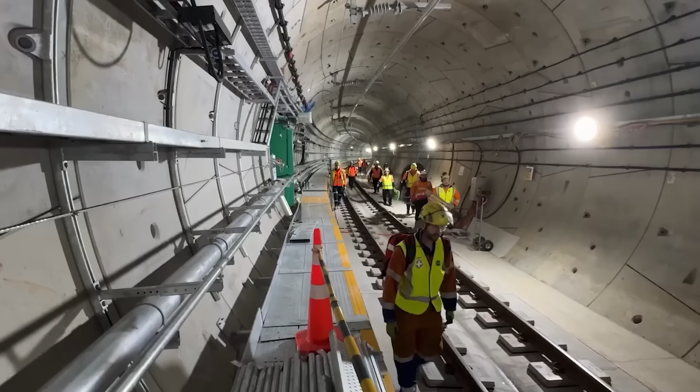City Rail Link is set to open for passengers in the second half of 2026. Auckland's eagerly anticipated City Rail Link is now set to open in the second half of 2026, the government and Auckland Council have confirmed. New Zealand is joining the Underground Rail Club, and it's doing so with a price tag of more than $5 billion.

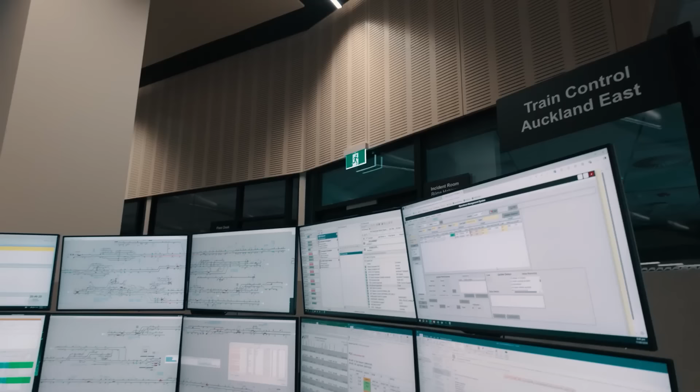For a country with a population of merely 5 million people, this is a lot of money to bank on one project. But the city's rail system has been struggling to keep up with the demand. And with more people choosing public transport over cars, this decision was long overdue. This is the story of City Rail Link and what it took to build it.

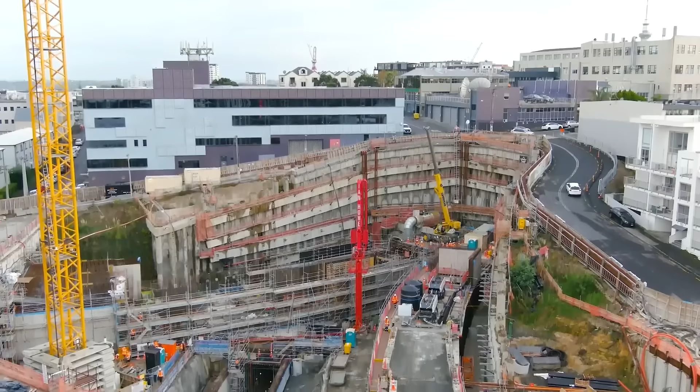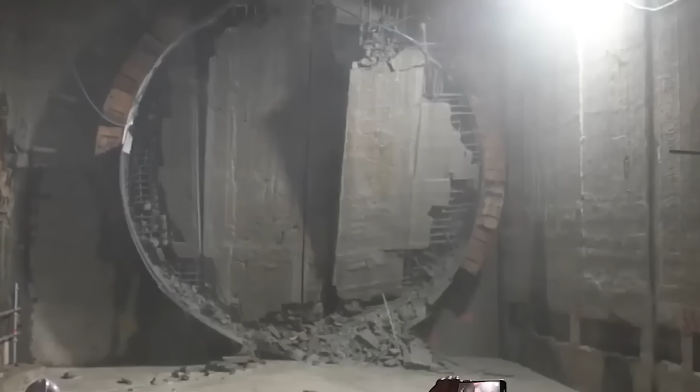The City Rail Link has the potential to transform Auckland from a city where you can't survive without a car to a modern city with fast, frequent, stress-free public transport. To understand why New Zealand spent $5.5 billion digging holes through the middle of its biggest city, you have to understand what Auckland's rail network looked like before this project started.

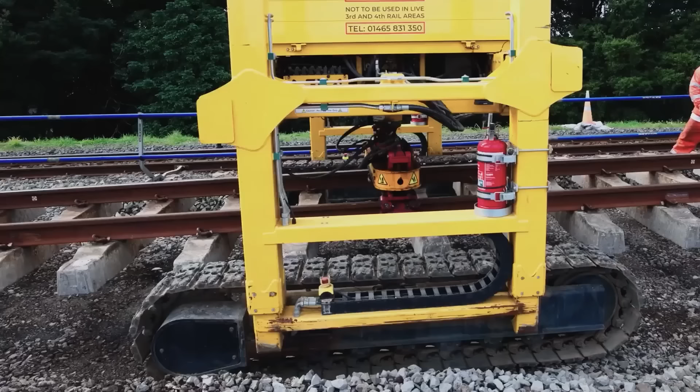The old system had one fatal flaw. Every train had to pass through Britomart, the central city terminus, and Britomart was a dead end. Trains came in, stopped, and had to reverse back out the way they came. That design capped the entire network at roughly 12 trains per hour in each direction. No matter how much you expanded the outer lines, no matter how many new carriages you added, the single point was always going to be a problem.

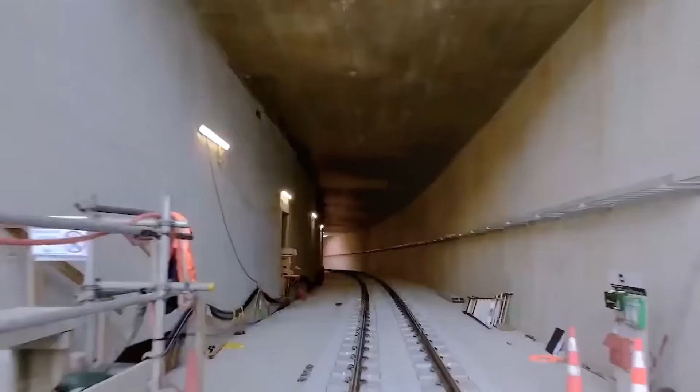The City Rail Link fixes this permanently. By connecting Britomart to the existing Western Line at Mount Eden through a new underground loop, the network transforms from a dead-end terminus into a proper through-running system. Trains no longer have to reverse. They flow continuously. And that single change unlocks 24 trains per hour. That's double the old maximum, and there's room to grow even beyond that. But building a loop through the middle of a live city is not a simple thing.

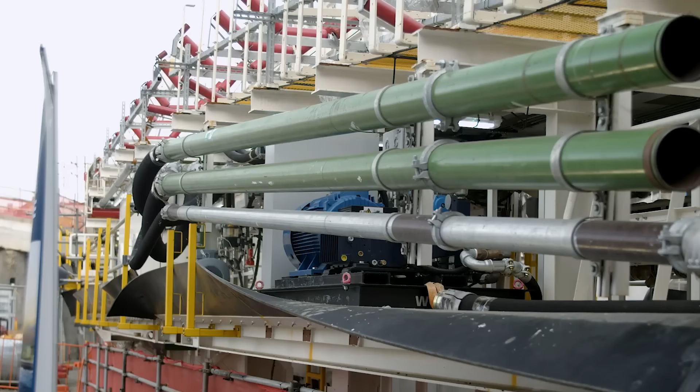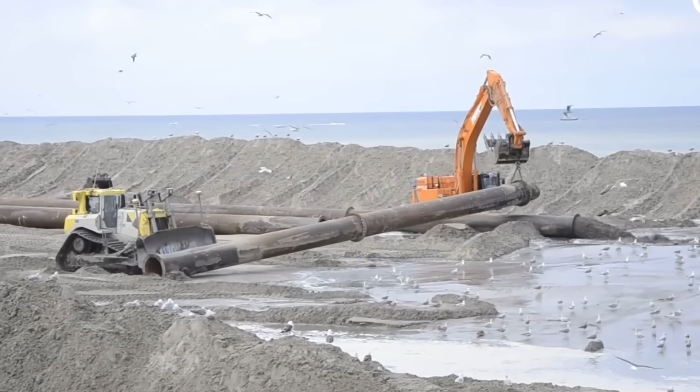Before a single tunnel boring machine went into the ground, engineers spent years studying what was actually down there. And what they found was complicated. Auckland sits on one of the world's most unusual volcanic fields. The city is built on top of roughly 53 volcanic cones, and the rock beneath it is inconsistent, unpredictable, and in some places, particularly near the waterfront, not rock at all. The land is reclaimed, fill material dumped into the sea over a century ago to extend the city's footprint. That fill is soft and waterlogged, completely unlike the basalt you find just a few hundred meters away.

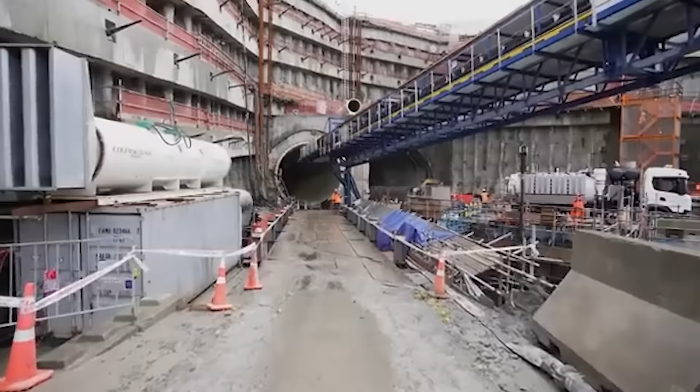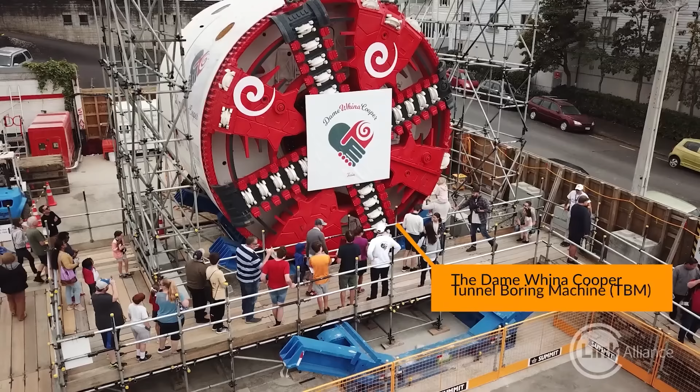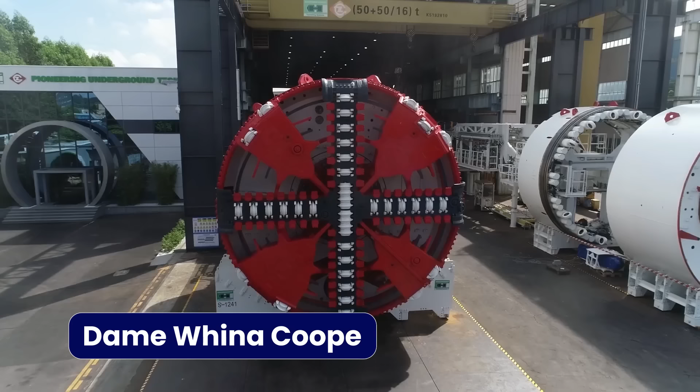So, the tunnels had to navigate two completely different geological environments, hard volcanic rock and waterlogged fill soil, where the ground itself could shift and collapse if pressure wasn't maintained perfectly. This is where the tunnel boring machine comes in. The star of the show. She weighs 2,100 tons and she's 10 meters long. Her cutting head is 6.8 meters in diameter, and her name is Dame Whina Cooper, named after the revered Maori land rights activist. Dame Whina Cooper is what's called an earth pressure balance machine.

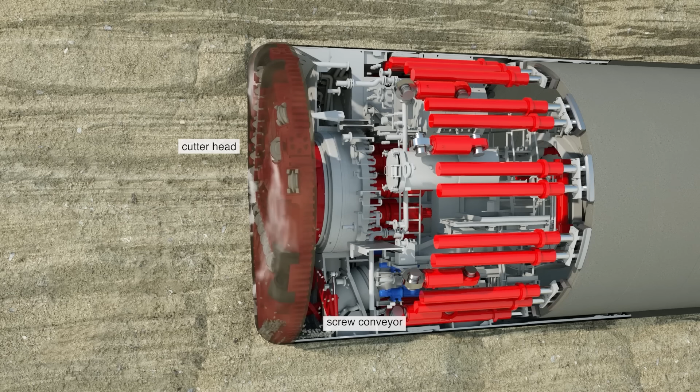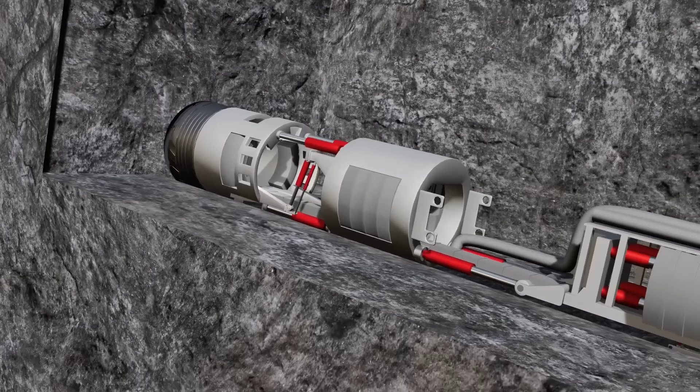The technology is specifically designed for urban tunneling through unstable or waterlogged ground. As the cutting head rotates and bores forward, the excavated material, called spoil, is kept under controlled pressure inside a sealed chamber. That pressure counteracts the natural ground pressure outside the tunnel wall, which prevents the surrounding soil from collapsing inward and stops the surface above from sinking. In a city, surface settlement is critical. If the ground above the tunnel drops even a few centimeters, you can crack building foundations, damage utilities, or destabilize roads.

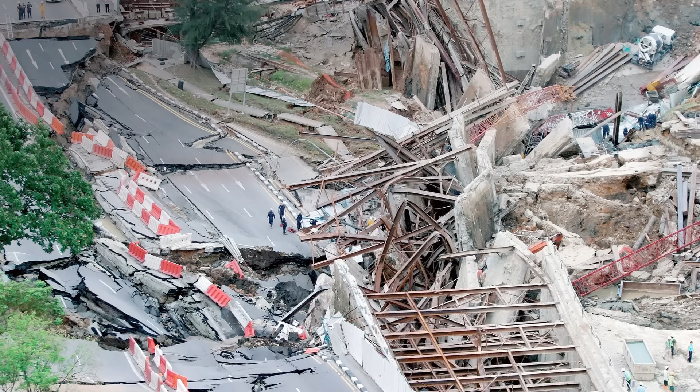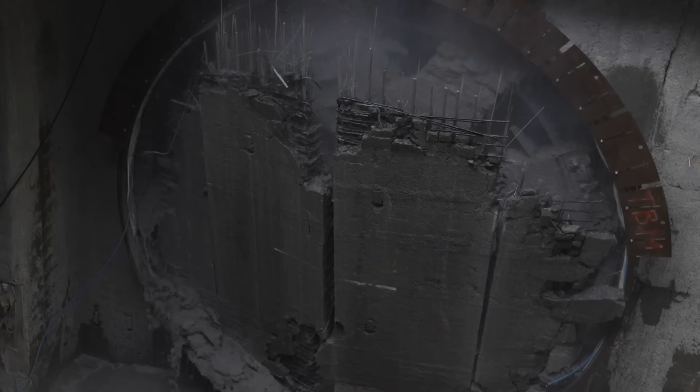Dame Whina Cooper was lowered into a launch box near Mount Eden in pieces because the machine was too large to move any other way, and then assembled underground. Her first tunnel drive ran northward toward the CBD. Then she was extracted, craned out, and prepared for the second parallel drive. That's 2 tunnels, each one 3.4 kilometers long. She moved at an average of 10 to 12 meters per day. Every meter she advanced, concrete segments were installed behind her to form the permanent tunnel lining.

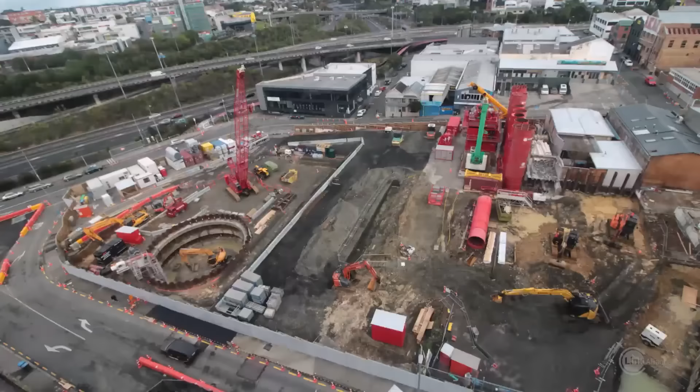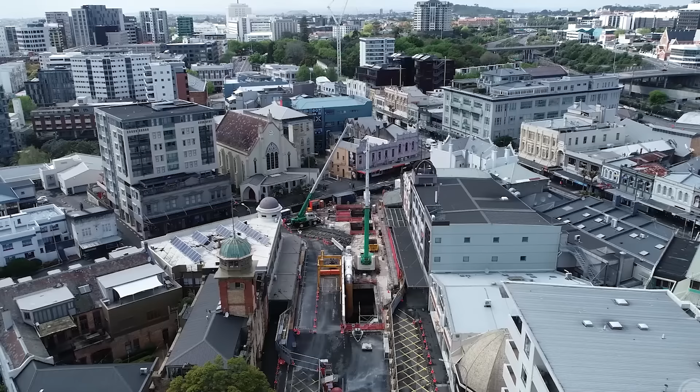But the TBM didn't build everything. 2 of the 3 new stations, Karanga Hape and Te Waihorotiu, required a different technique entirely. For these stations, they used cut and cover construction, where you dig down from the surface, build your structure, and cover it back up. It sounds straightforward, but in the middle of downtown Auckland, with live traffic above, functioning businesses on either side, and a web of underground utilities threading through every cubic meter of soil, it is one of the most logistically complex things you can attempt in civil engineering. On Wellesley Street, the main construction zone for Te Waihorotiu station, the project team had to maintain traffic flow while simultaneously excavating.

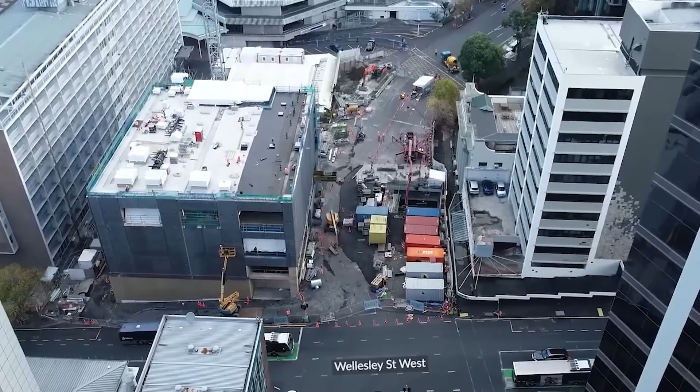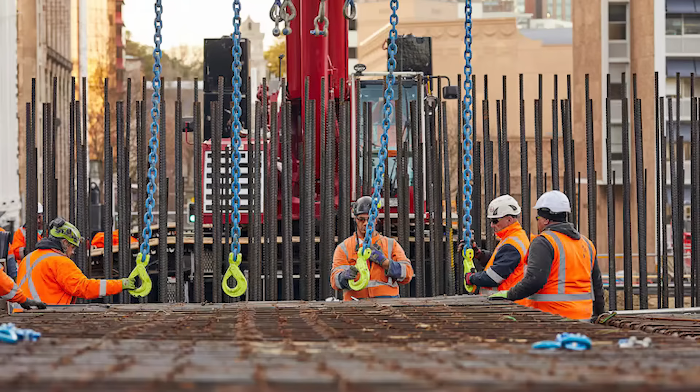They did it in stages, installing steel ground anchors horizontally into the surrounding soil to hold the excavation walls, while digging proceeded in lifts, one level at a time, downward. And what they built at the bottom of that hole is extraordinary. Te Waihorotiu station sits 32 meters underground. That's roughly the depth of a 10-story building, inverted.

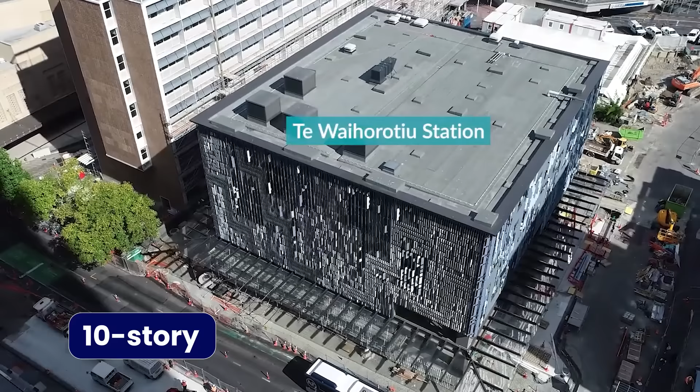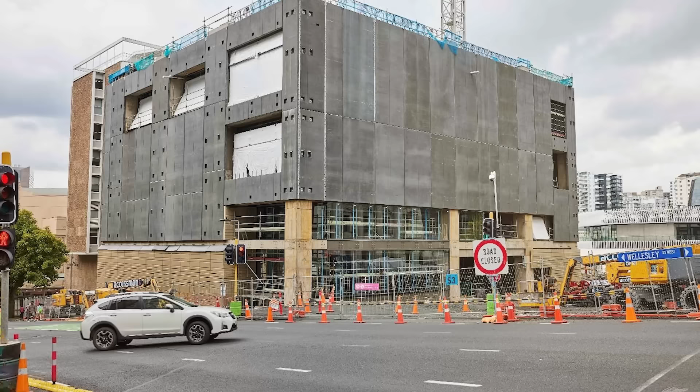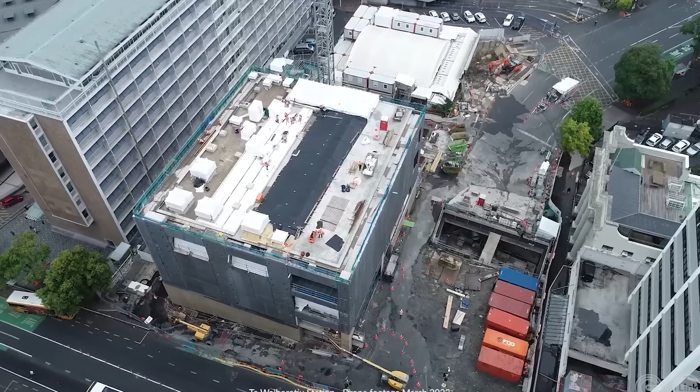From a structural standpoint, that skylight is a feat of engineering in itself. Punching a vertical opening through a structure at that depth, while maintaining the structural integrity of every level around it, required precision reinforcement work that had never been attempted at this scale in New Zealand. But every mega project has its crisis point. The City Rail Link had several.

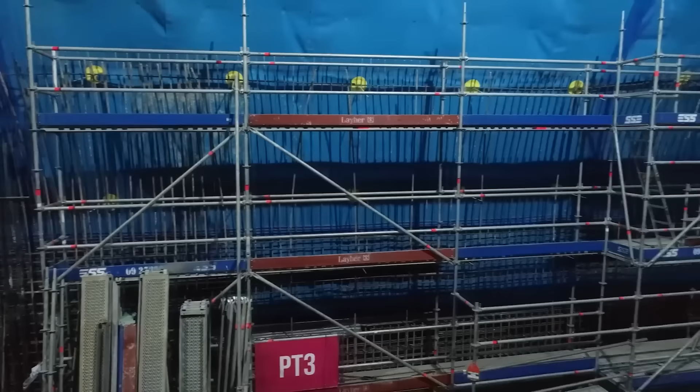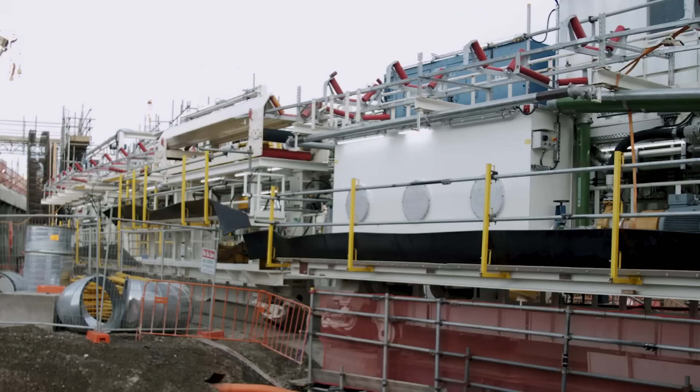The City Rail Link is not only a day late and a dollar short, $1 billion over budget and several years late. The COVID-19 pandemic hit during a critical phase of tunneling. Supply chains for specialist equipment needed for the project froze, and skilled labor availability collapsed. The project was already expensive by New Zealand standards, and the pandemic added cost and time that no risk model had anticipated. Then came the geotechnical issues.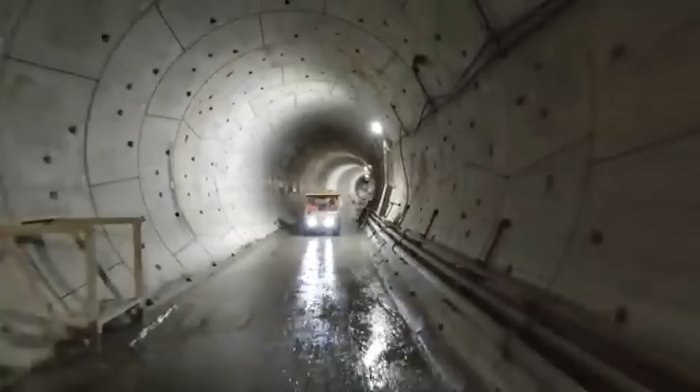Auckland's volcanic geology is well documented, but the ground still found ways to surprise engineers. There were pockets of material that behaved differently than predicted. Groundwater intrusions and sections where the tunnels ran close enough to existing building foundations that every meter of advance had to be monitored in real time.

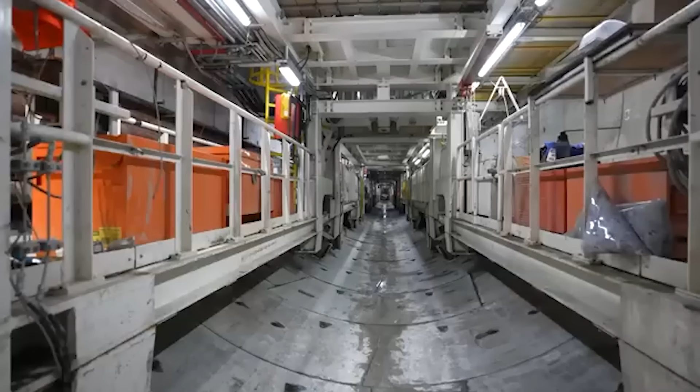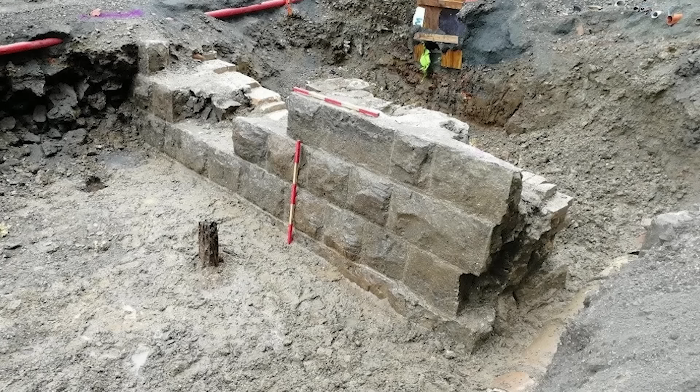There was also a moment during excavation of the Aotea station box near Queen Street where workers discovered significant archaeological material. The area had deep historical significance, and work halted while heritage assessments were completed. On a project this scheduled, every delay compounds. Despite all of it, the project held together, and the end is in sight.

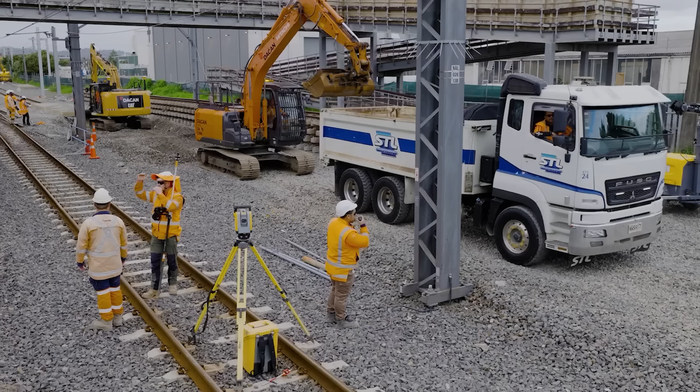The City Rail Link is currently in its systems integration and testing phase. The hard excavation work is done. What remains is the installation and commissioning of rail systems, and then the testing phase before it carries a single passenger. Testing on a project like this is slow by design. You run the trains, stress test the signaling, simulate emergency scenarios, and find the edge cases and fix them. You run the trains again.

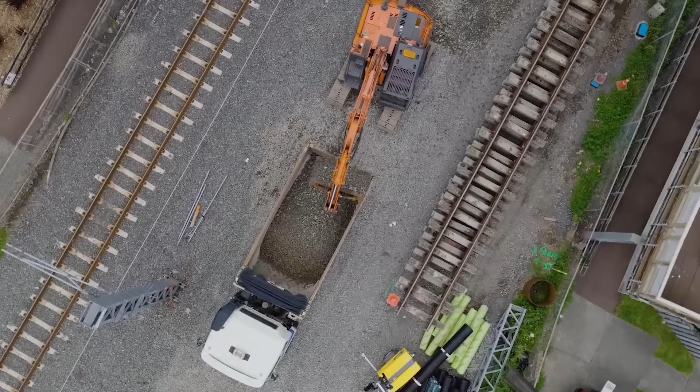The system cannot open until every variable has been validated, because unlike a road where a pothole causes an inconvenience, a failure in an underground rail system carries consequences that escalate quickly. The target opening is late 2026, and when it opens, the benefits will be many. The network today can run 12 trains per hour through the central corridor. After opening, that number becomes 24.

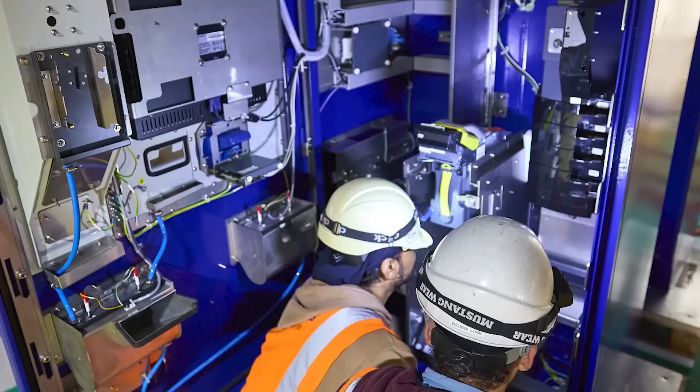Existing stations on the western and eastern lines like Henderson, Papakura, and Manukau will see increased traffic without any additional infrastructure investment. Auckland's rail patronage was growing consistently before the pandemic and recovered faster than most transit systems afterward. The City Rail Link was designed for a city that is still growing, projected to hit 2 million people within the next 2 decades. The tunnels being bored today are carrying that future population.

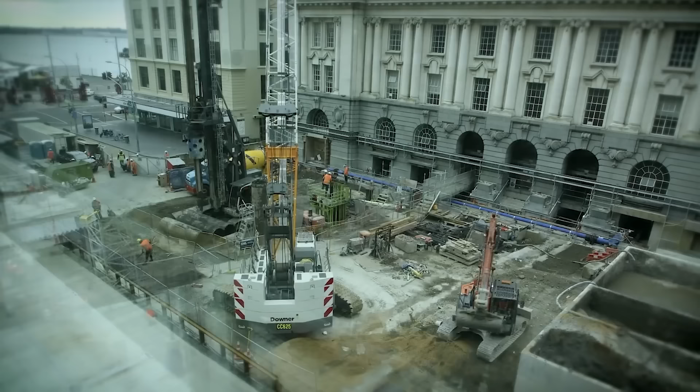New Zealand is a small country. Its cities are relatively modest by global standards. And for most of its history, it has built like a country that assumed cars would always be the answer. The City Rail Link signifies a shift from this. It is an argument that Auckland's future cannot be built above ground, that it's a city trying to compete with Sydney, Melbourne, and the world at large.

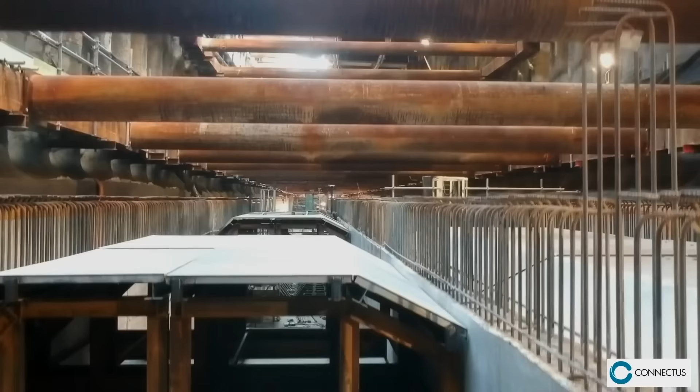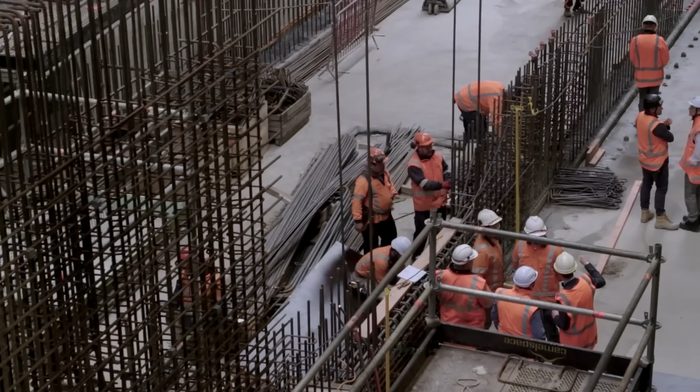And in 2026, when the first train runs from Britomart through the new underground loop and emerges at Mount Eden without stopping, without reversing, without waiting, that decision will finally be visible. And here's the thing, Auckland isn't alone. Cities all over the world are doing the same thing right now, digging under their own streets, spending money they don't have yet, and building for populations that haven't arrived yet. Sometimes it works, sometimes it doesn't.

So, I want to know what you think. Is underground rail the future for growing cities, or is $5.5 billion a price tag that just doesn't make sense when most people still drive?